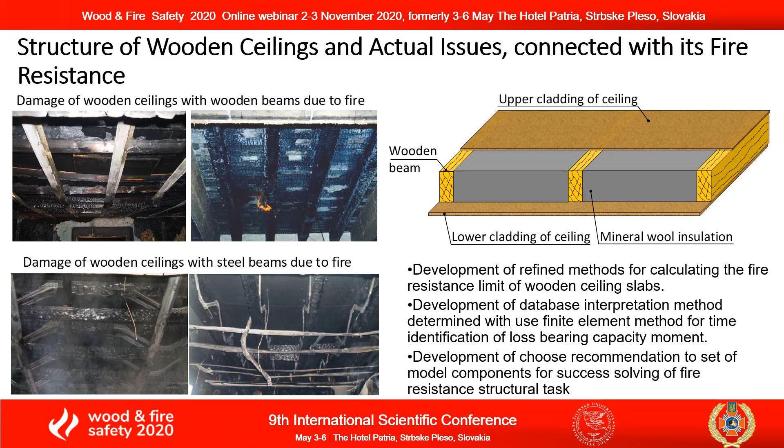The use of the finite element method with nonlinear setting is one of the most promising ways for solving building structures fire resistance tasks. As a sample for calculation method development, the most widespread wooden ceiling construction was chosen. The calculation scheme and constructive scheme of beams location is shown on slide 3.

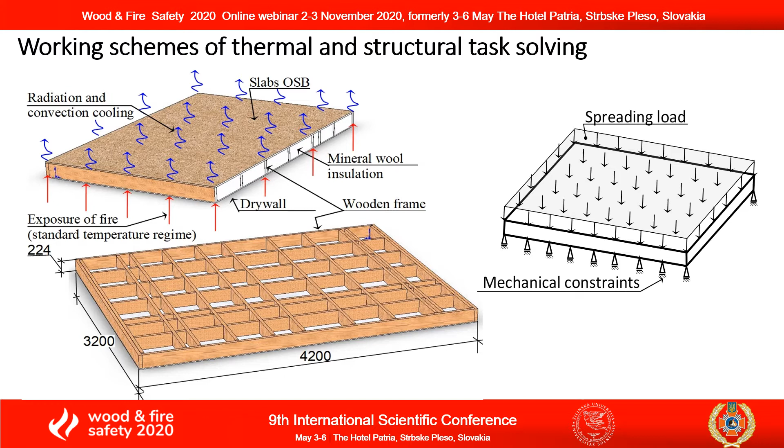The feature of fire resistance evaluation tasks of building structures elements is sequential solving of the thermal problem and structural problem. In the table on slide 4, the basic components of mathematical models for thermal and structural problem solving are shown.

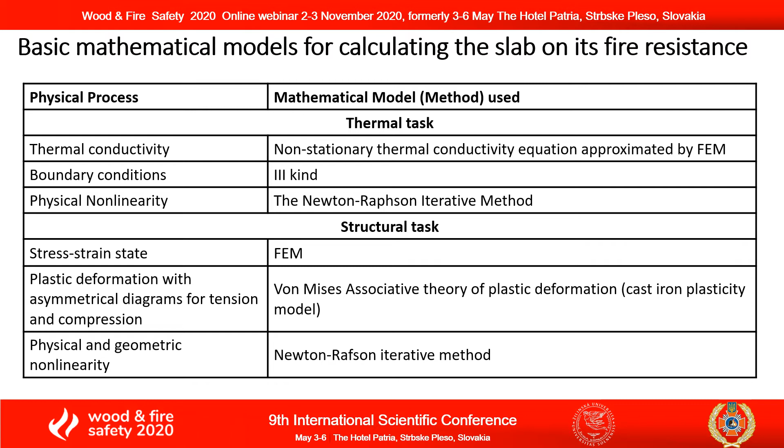The meshing models for the fire resistance evaluation task with use of the finite element method were built separately for the thermal problem and structural problem. These meshing models are represented on slide 5. The structural problem was set only for the wooden frame of the ceiling.

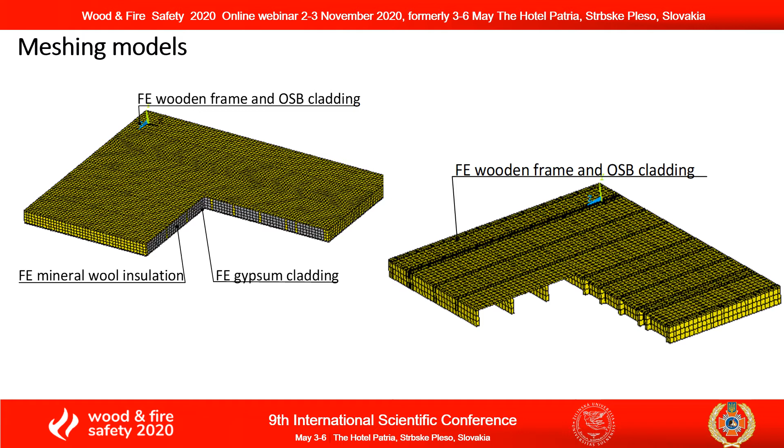The wood thermal properties and properties of other materials, thermal conductivity coefficient, specific heat and density, are represented on slide 6. The wood mechanical properties were used for structural problem solving as an unsymmetrical deformation diagram recommended by EN 1995-1-2:2005 EuroCode 5. Also, the thermal expansion deformation corresponding to these recommendations was used for solving this problem. These properties are shown on slide 6.

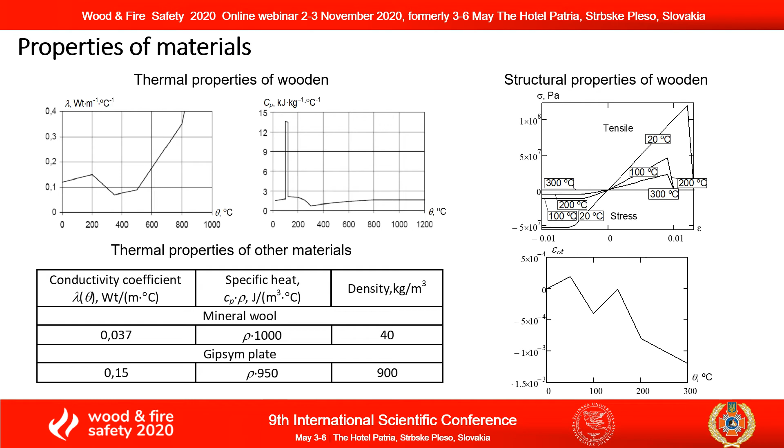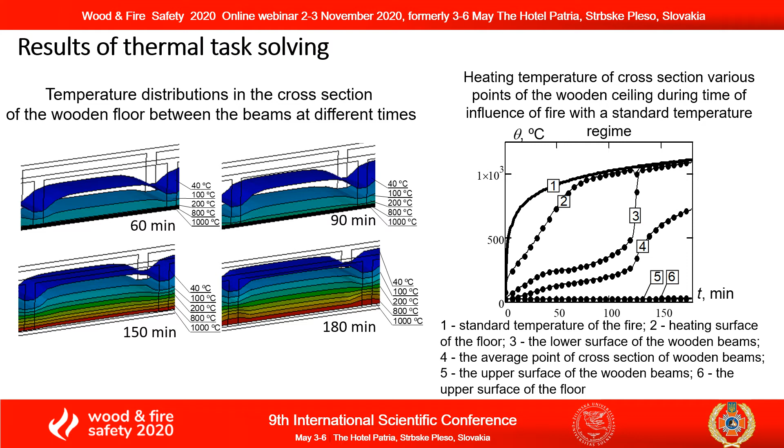The results of thermal problem solving are represented on slide 7 as temperature distributions on the cross-section of the wooden slab at different time moments of standard fire regime influence.

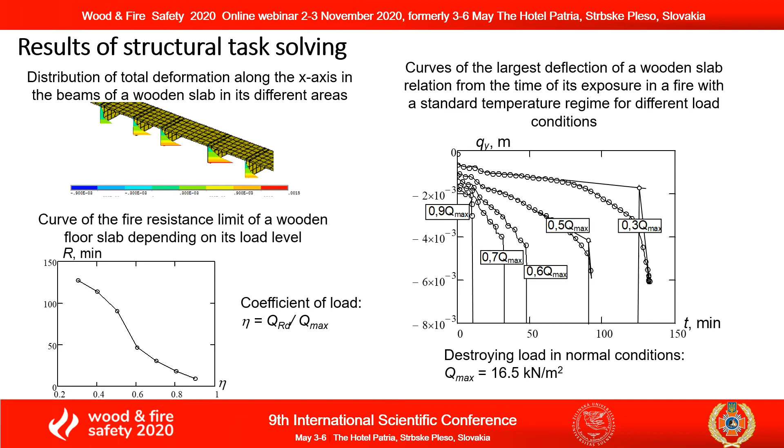The fire test was conducted for calculation results validation. Slide 9 consists of the construction scheme of the installation for the fire test. On this slide, the geometrical configuration of the cross-section, the scheme of thermocouples location in the frame beams, and load weights were shown.

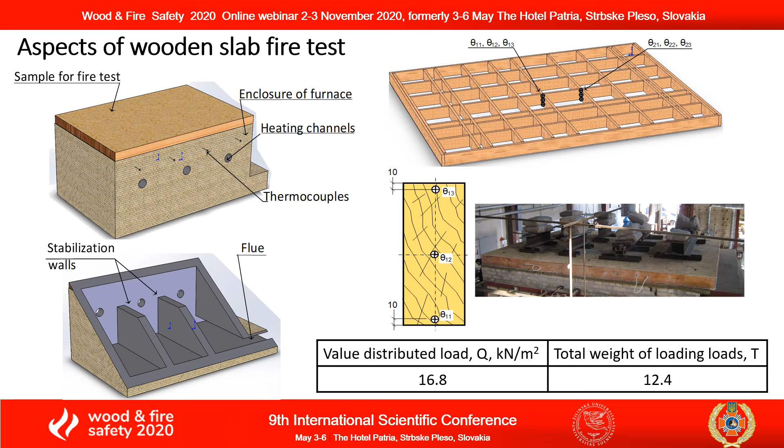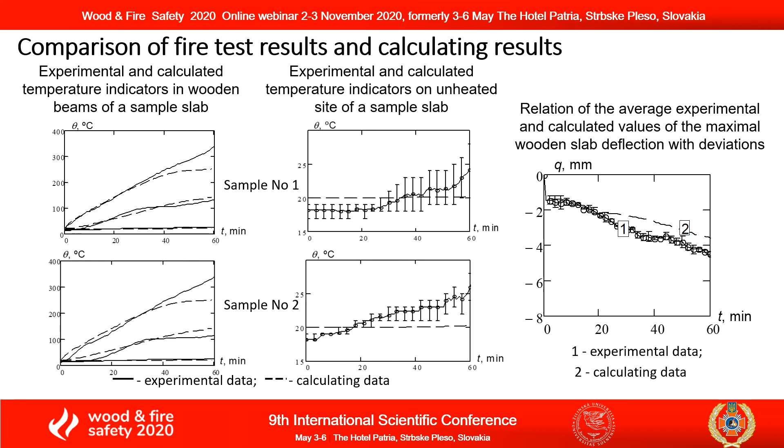The adequacy validation results of data determined by the finite element method, by comparison of this data with experimental data, are represented on slide 10. The look of the represented curves shows that these results are well matched. The general conclusions were represented on slide 11.